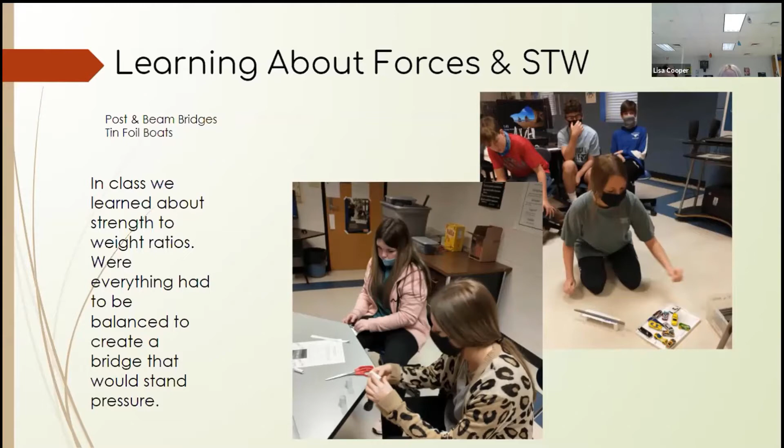The Warren Truss bridge uses equilateral triangles to spread out all the weight, and it minimizes all compression and tension forces. Deciding the type of bridge that we were going to make, breaking down and understanding the whole process of what we needed to complete was an immense challenge.

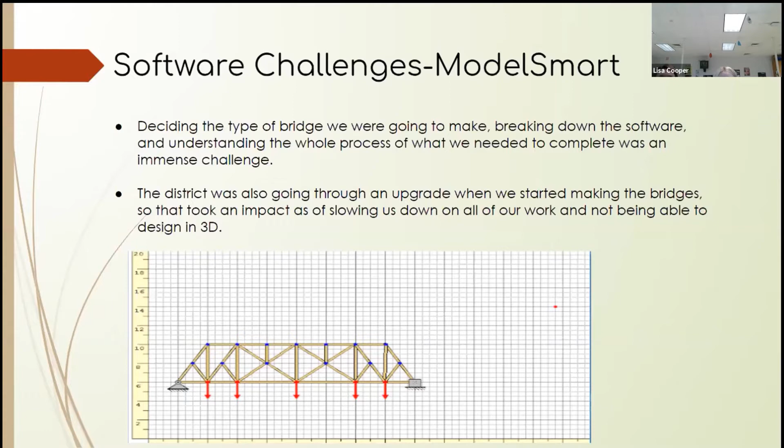Bentley was a challenge because there was a lot of options that you could choose from. It was really fun after you figured out how to use the options and how to dimension the elements.

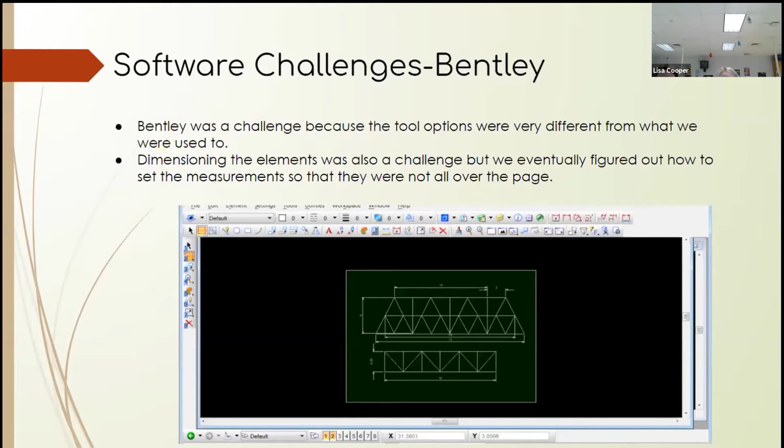Whenever we were testing our bridges, first we massed our bridges using a triple beam balance scale, and then we placed our bridges on a Pitsco structure tester and applied force to see how much the bridge would hold before it broke. This is on our last attempt, attempt number 4.

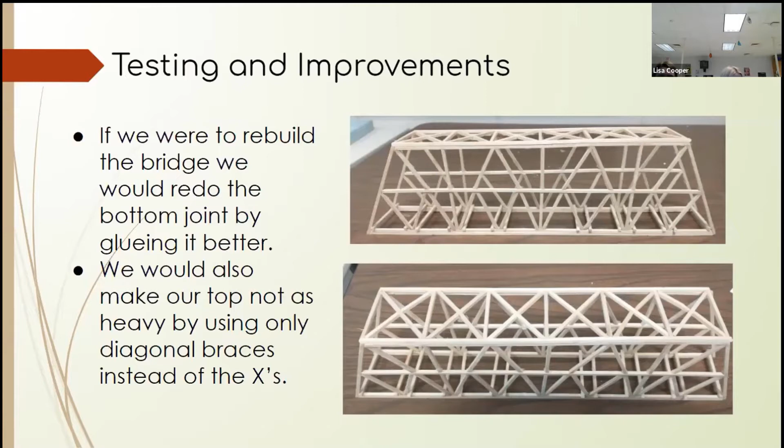If we were to rebuild the bridge, we would redo the bottom joint by gluing it better. Some of the joints broke off too. We would also make our top not as heavy by using only diagonal braces instead of X's. We actually went back in and removed the X's, just using diagonal.

We learned that we needed to make sure that everything was right and it was all symmetrical so that the bridge would be balanced enough to hold. We also learned that our cuts had to be exact or the bridge wouldn't have strength because the joints would not connect. And we learned bigger is not always stronger, and taller is not always better, when building our bridges.

We are the Cyberdean Builders. The reasons behind our design: we used a modified Pratt and Howe bridge because it consists of many triangles. The design was also 2 of the most common designs we've seen so far.

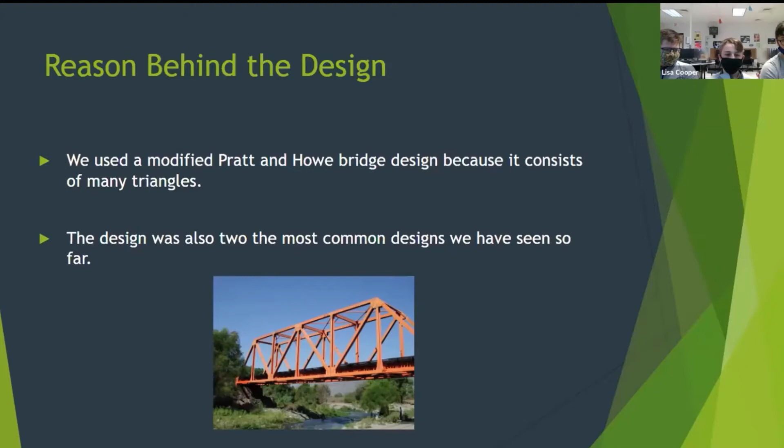One of the construction challenges that we faced was making sure that the measurements of the bridge lined up and that one side was not longer than the other. We also had to make sure that the cuts were exact so we would not waste too much wood.

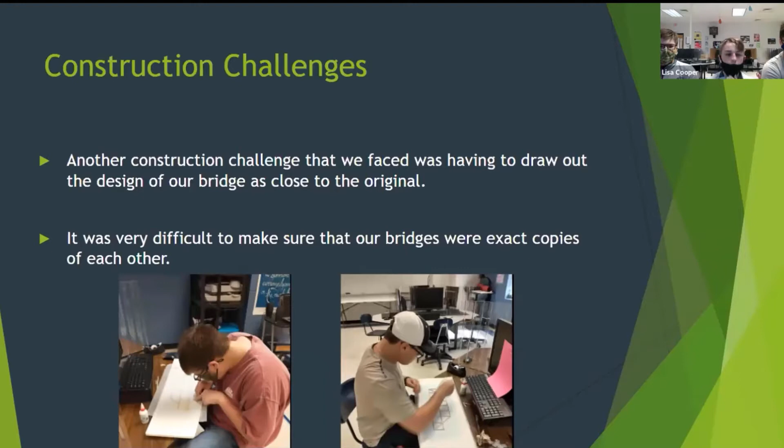Another construction challenge that we faced was having to draw out the design of our bridge as close to the original as possible. It was very difficult to make sure that our bridges were exact copies of each other. We also decided to use a design on top of our bridge, unlike before when we had a set of single pieces of wood going across the top. We also noticed that our bridge has two points where the forces meet.

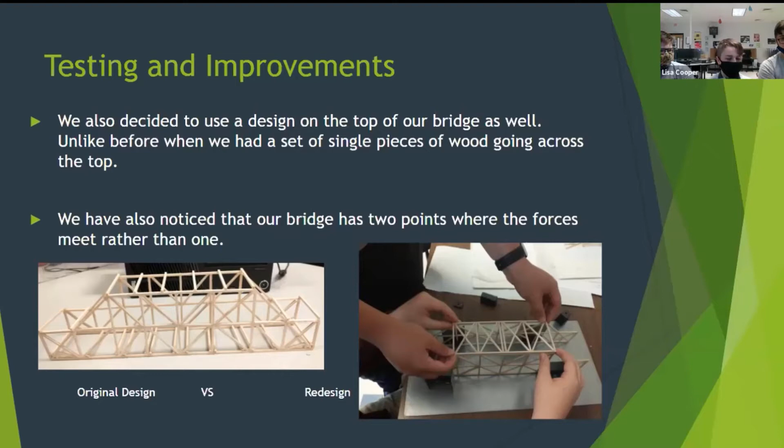We learned that it means to be responsible and work together as a team. We also learned to give our opinions on any problem and use each other's ideas to solve the problem.

We're the TBD. Starting off with the design, all three of us compared builds and later agreed to use the altered Baltimore truss style bridge.

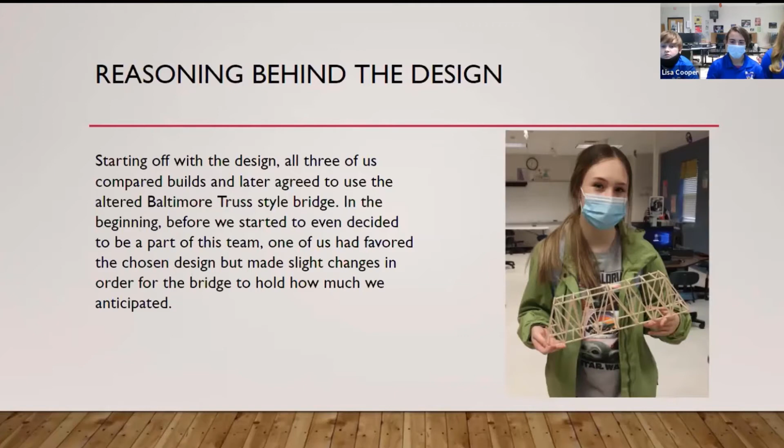Bridges made of triangles are stronger than those built with straight principles set at 90-degree angles. A bridge has to be symmetrical in order to be strong. In our Baltimore truss, the design includes diagonal members in a symmetrical pattern that take in both tension and compression forces as the live load crosses it.

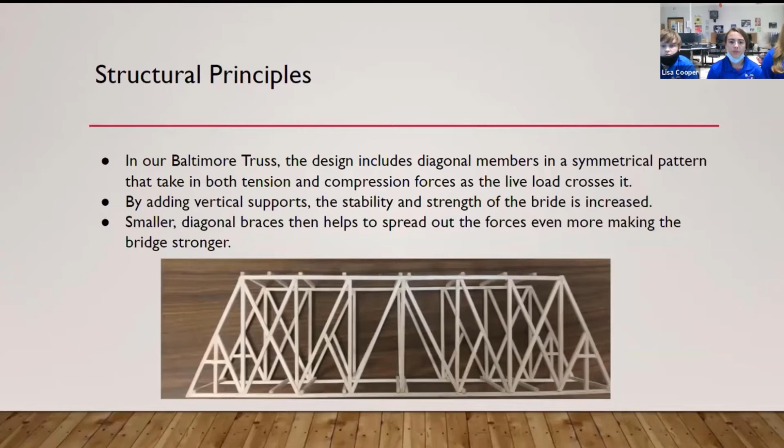By adding vertical supports, the stability and strength of the bridge is increased. Smaller diagonal braces then help to spread out the forces, making it even stronger.

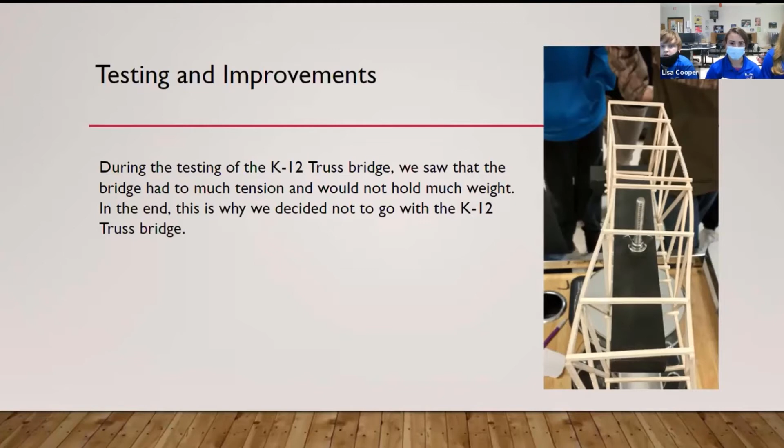During the testing of the K-truss bridge, we saw that the bridge had too much tension. It would not hold much weight. In the end, this is why we decided not to go with the K-truss bridge.

As we look at the Baltimore truss bridge design that we chose, we noticed that they all held very well, and the main fault was a construction failure. We mainly favored the structure and design of the bridge along the way it was modified. We then pursued the design.

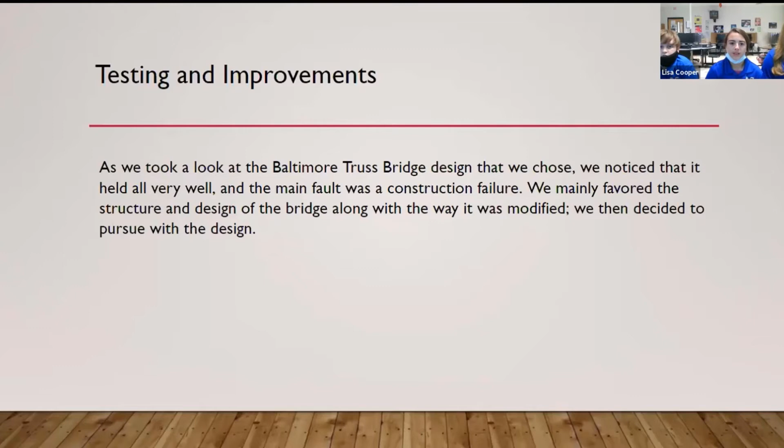We learned that one of the most challenging parts of building was attempting to fit the pieces perfectly, as well as being able to have everything symmetrical. Along with this, we learned how to safely use the materials we needed and to be extra delicate with every piece. Also, learning what held better was a big necessity.

Many triangular pieces were our biggest advantage, especially with the Baltimore truss bridge. We learned that we needed to pay big attention to all the details.

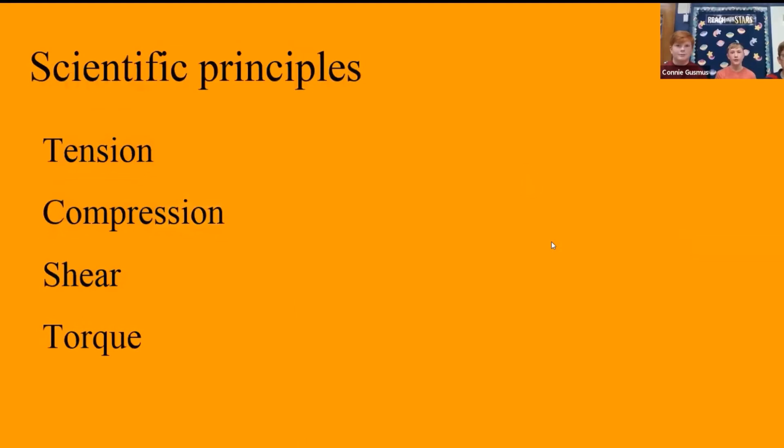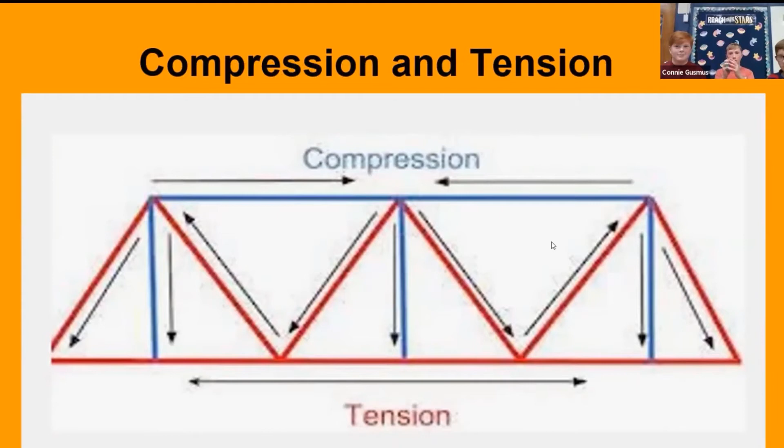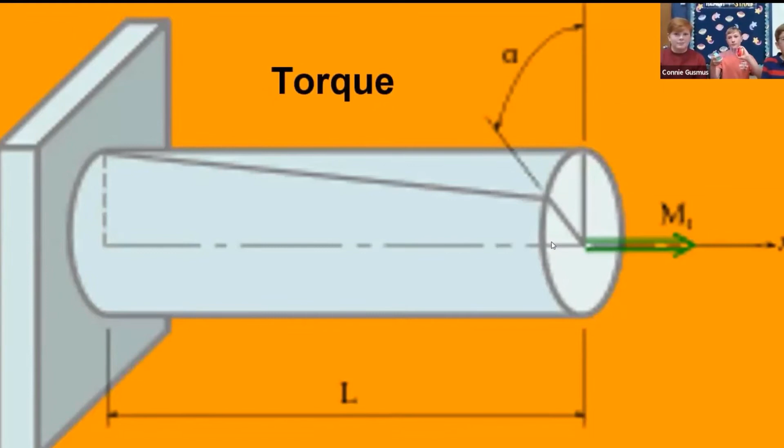These are our scientific principles: tension, compression, shear, and torque. This is an example of tension and compression: tension is pulling the wood tight, compression is applying force on the wood, shear is sliding the wood which might cause structural strain, and torque is twisting the wood which might cause rotation. This is an example of a bridge with torque, which we do not want our bridge to do.

We know that in construction, triangles are the strongest shape because they can hold the most weight. We wanted to stick toward designs like the Pratt, the Howe, the Camelback, and the Warren. After researching, we tried to decide our design using ModelSmart 3D.

We took our structure weight and our breaking load and averaged them out, and these are our top three bridges. John David's best bridge was 1,204. Colin's best bridge was 1,143. And Trey and my best bridge was 896.

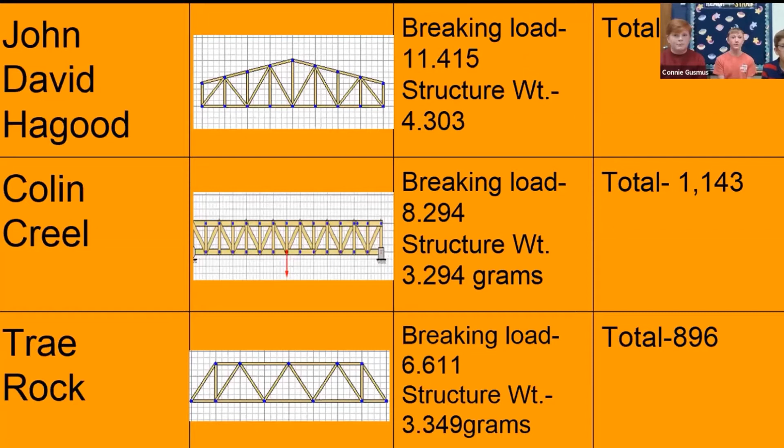This red arrow shows where we put the load on it so we can test it, and it will pour down on the bridge. Over here is a fixed support and a horizontal roller. The darker shades of the colors mean that it had more strain on the wood.

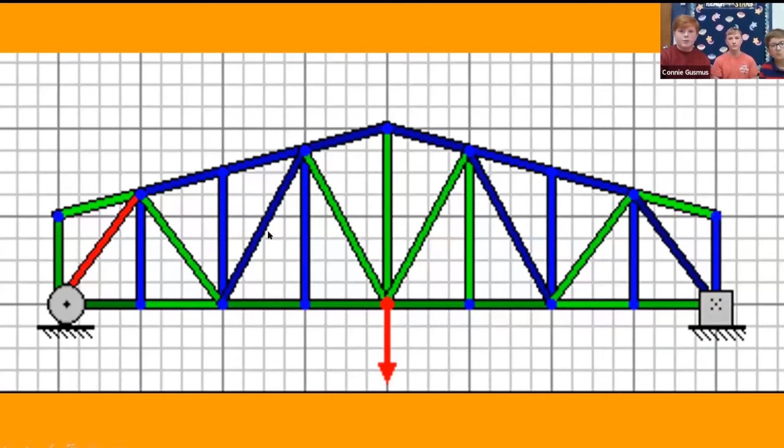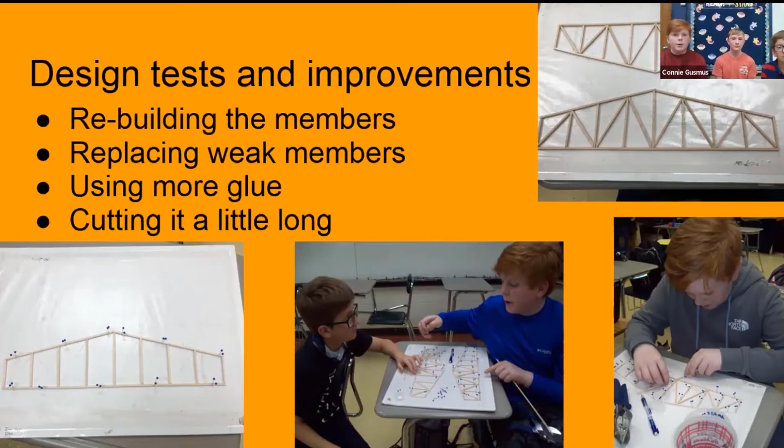After we finished gluing both sides and doing small tests, we figured out we needed to rebuild some members that were either cracked or broken, replace weak members because the wood was too spongy, use more glue for a stronger fit, and cut the wood just a hair long so it would have a tight fit.

This is us after we finished both sides of the bridge in 2D, and as you can see, we finally fixed the 3 pieces of balsa wood that were going the same side.

We measured the mass of our balsa wood because we wanted to see how much our bridge would weigh and how much we wasted versus used. The mass of our bridge was 10.3 grams, the mass of our scrap wood was 3.7 grams. Our scrap wood is the wood we put to waste and didn't use when cutting excess wood off, and the mass of one stick is 1.8 grams.

We wanted to see how much wood we used, so we added the mass of the bridge and the scrap wood together and divided it by the mass of one stick, getting 7.8 — so we used about 7.8 sticks of wood in all. We did this because in the real world, when doing a real project, you want to be as inexpensive as possible and waste no material.

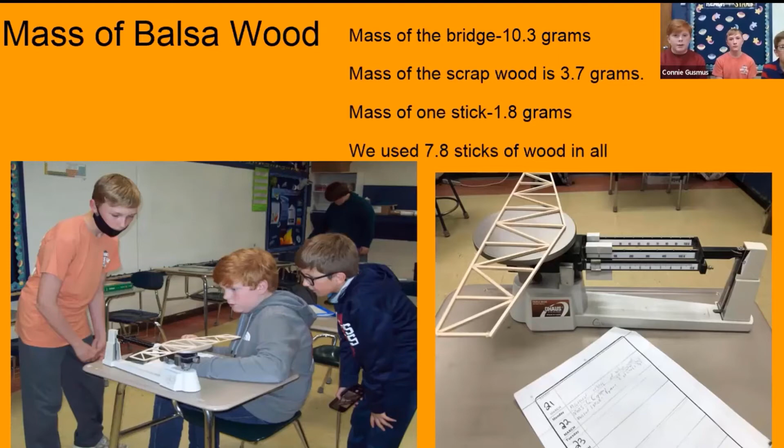This is our final bridge design after we 3D'd it, and as you can see where the broken member is in the big red circle, that is where it broke during the process of 3D'ing our bridge.

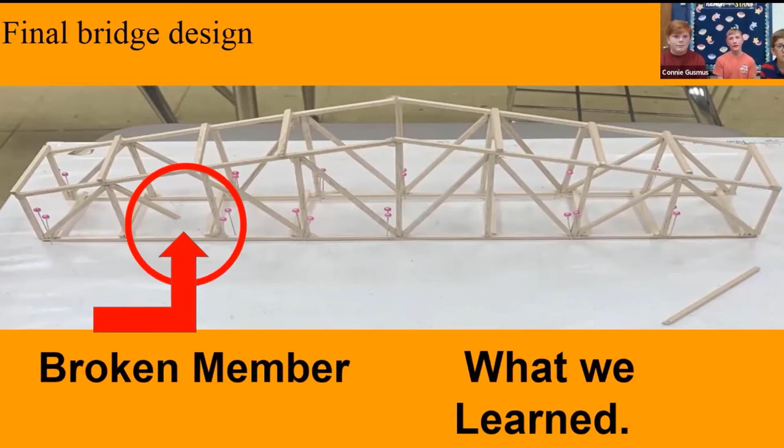What we learned from this was teamwork, work ethic, and that when you're engineering, you're going to face challenges and you have to overcome them.

This is our bridge after we fixed all of the broken members and all of the other cracked members. This is our bridge now, fully built.

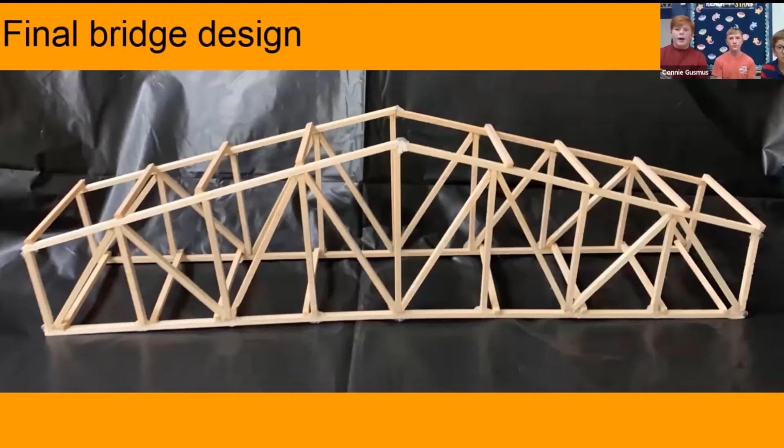Our teams this year are Big Brains and Team Volume. Our team was called the Big Brains. The goal of this project was to design a lightweight bridge that would hold a lot.

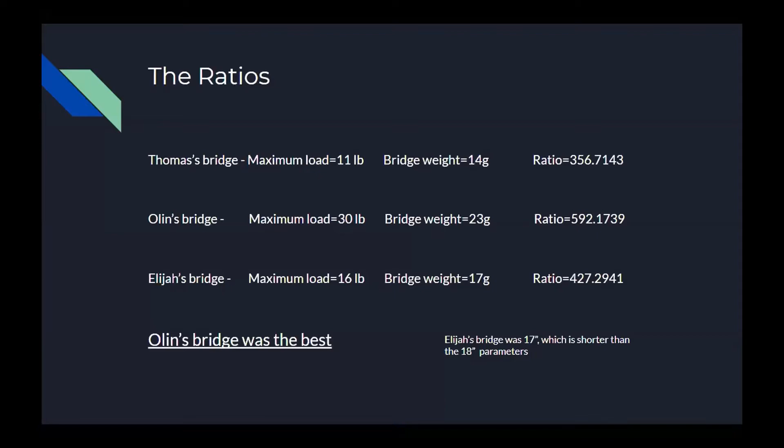We decided to build 3 separate bridge designs and see which had the best strength-weight ratio. We ended up all building different variations of the Pratt bridge. The Pratt bridge originated in 1844, originally designed by Thomas and Caleb Pratt to go over a 250-foot gap, and it was most commonly used for railroads.

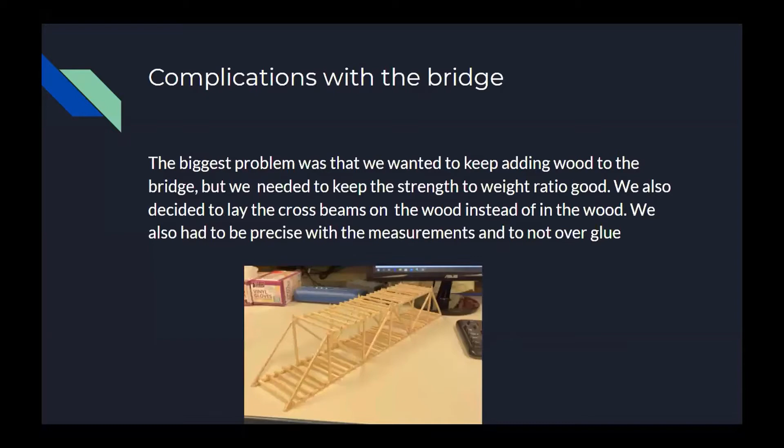Some complications with the bridge were that we wanted to keep adding wood to make it stronger, but we needed to keep our strength-weight ratio good, and we needed to be patient and precise with our measurements. The way we design our bridges is with ModelSmart software.

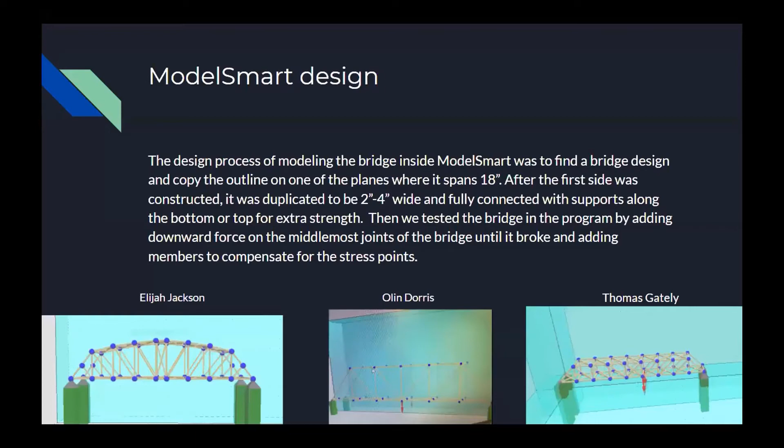The way you make your bridges is you put the joints on the plane and connect them with members, spacing them about 2 inches apart and connecting them across with members. After we used ModelSmart to make our bridges, we made a 2D render in Bentley.

Something I learned from doing the bridge is that when you're cutting angles, it's important to get your angles right so there aren't gaps in your bridge, called weak points, and to not force members in that are too long to support.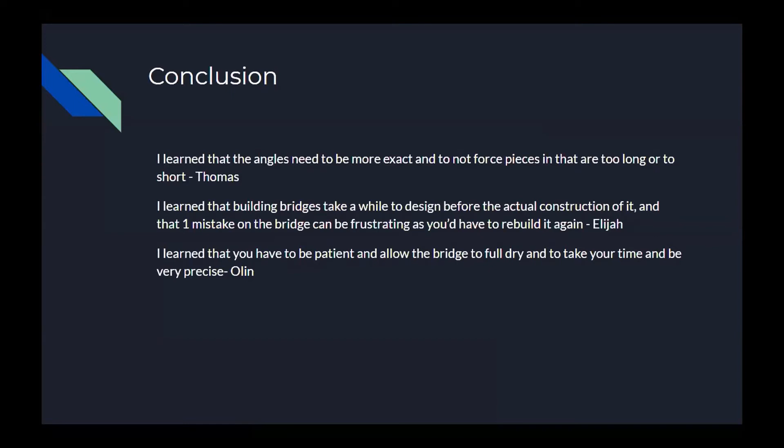What I learned was that it takes time, and if there's one mistake, you'll have to rebuild it. I also learned to be patient with my bridge and allow it to fully dry, and again to be very precise with the measurements and angles.

This is Team Volume's 2021 AASHTO Bridge Competition presentation.

I'm Sawyer Levinson. I did a modified Baltimore truss bridge. I then did the modified Pennsylvania truss bridge. I did a modified Howe bridge.

This is my bridge. As you can see, I added and subtracted a couple members from the sides to make it a little bit stronger and weigh a little bit less. My strength to weight ratio was 475.6.

And this is my bridge. It weighed 24 grams and it held 35 pounds.

Its length was 18 inches and its height was 4 inches. The strength to weight ratio is 662.1.

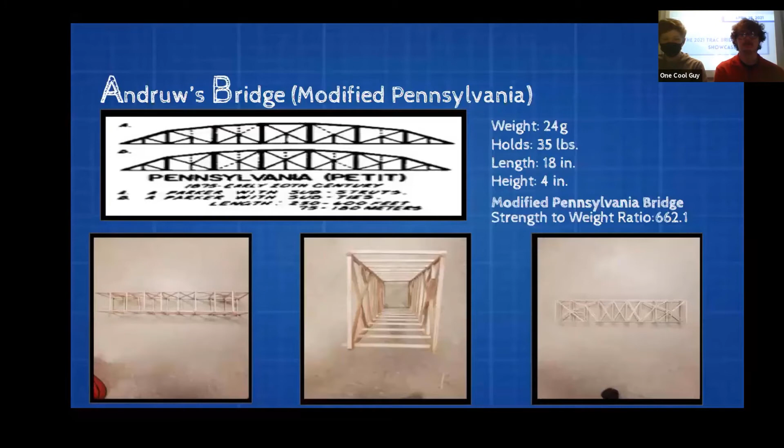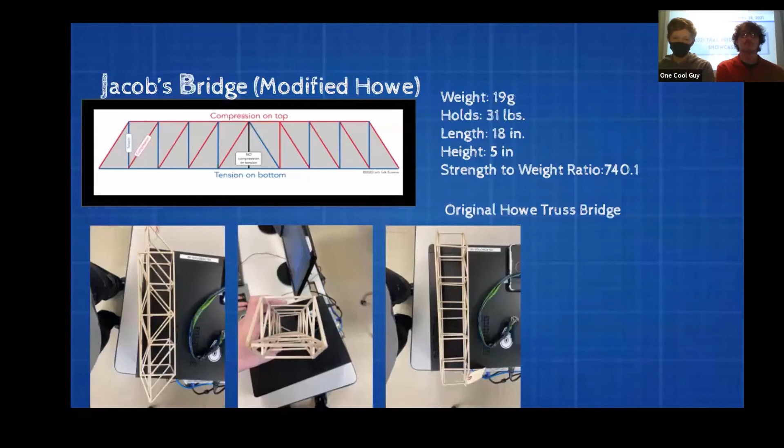My bridge was a modified Howe. It weighed 19 grams, it held 31 pounds, had a length of 18 inches, a height of 5 inches, and a strength to weight ratio of 740.1.

This is the Bentley sketch that we used the Michigan tutorial for to do, and it shows all the different views of the bridge that we chose and all the lengths.

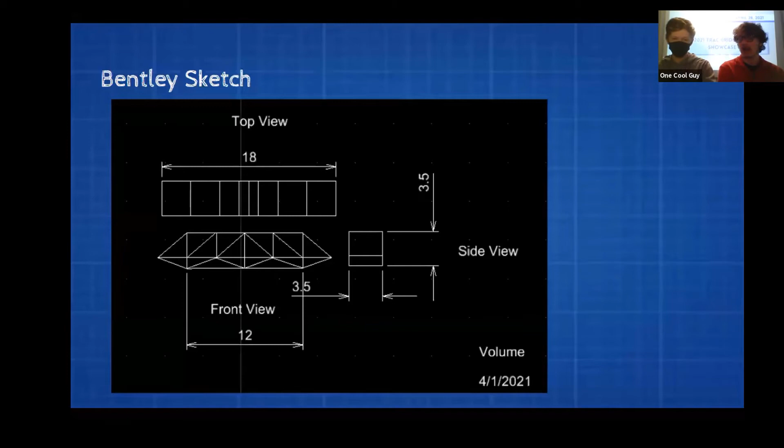Possible improvements we could have made were, after making and testing all of the bridges, we could support the ends of the bridges more and put triangles as supports, because we learned from Jacob's bridge that the more stuff you have supporting it underneath, you could still make it light, but also make it strong.

And what we learned was patience, and we learned timing, and then we learned craftsmanship, and we also learned teamwork.

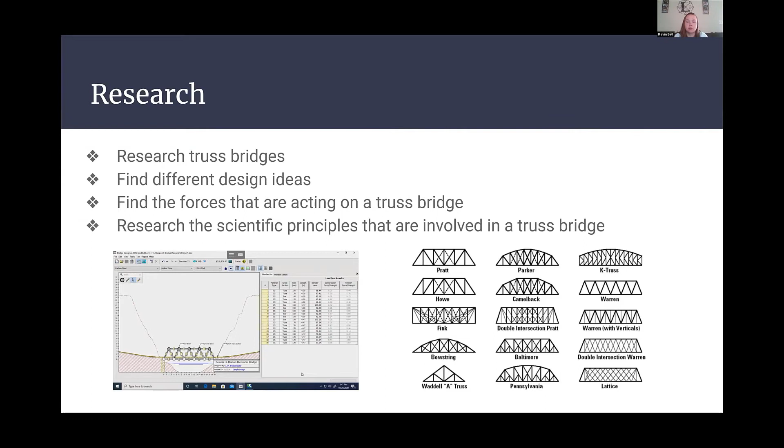When we first started this project, we researched different types of truss bridges and used those to come up with our own design. After we did that, we researched the scientific principles involved in truss bridges, and we found the forces that act on a truss bridge and combated them.

At the beginning of our school year, we did tech talks in class. This helped us practice public speaking, scientific principle research, proposal principles research, and presenting research in class.

There are many forces that acted on our bridge during this competition, and we tried our best to design a bridge that can combat these forces.

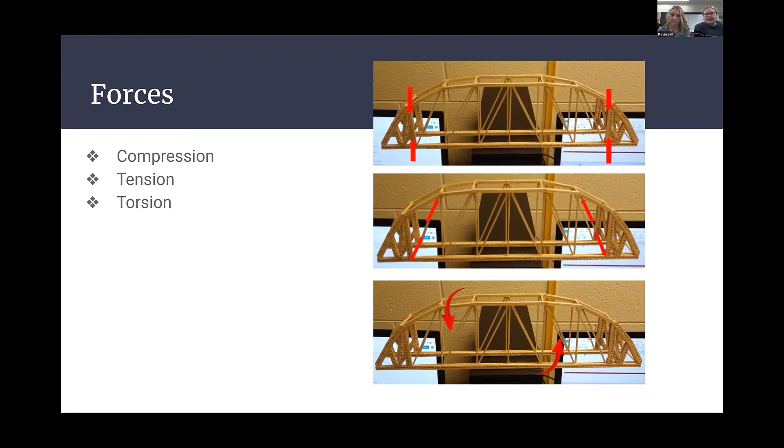Another force we had to combat was deflection. As you can see, the testing block pushes down onto our bridge, and we had to make sure that our bridge could hold that. In the bottom left-hand corner, we have modulus of elasticity, which is the pushing and pulling of an object.

We have friction, and you can see where our bridge rubbed on the Pitsco tester. And in the bottom middle, we have shear force. You can see where the testing block pushes down on our bridge and where it would lift up in the back on the other side of the tester.

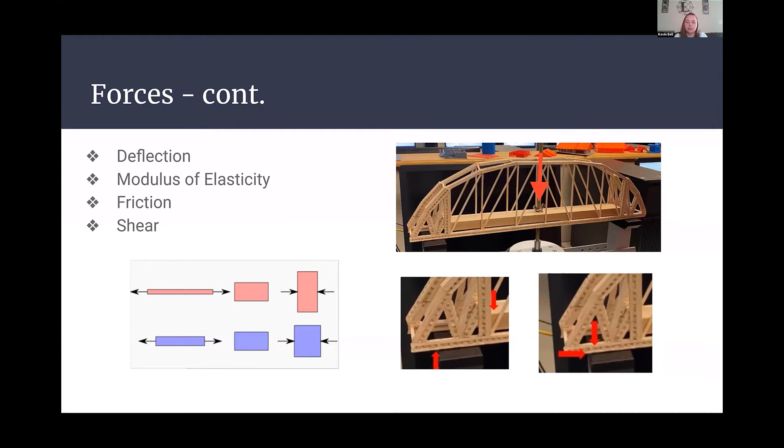We had different construction tools that we used throughout this process. Another construction tool that we used was a 3D printer. We used the MakerBot Replicator Plus to make jigs to hold our balsa wood in place while we glued it, so it would all be even and wouldn't move.

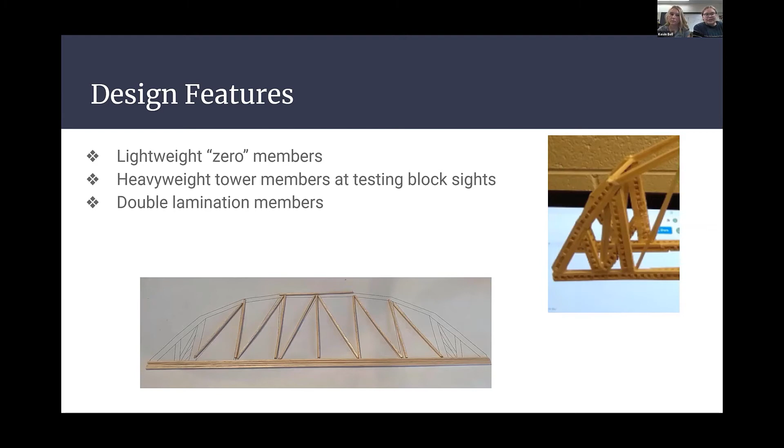We had many design features that we put into our bridge so it would be the most efficient. We had lightweight zero members, which were single pieces of balsa wood that hold little to no weight. We had heavyweight tower members at our testing block sites, specifically shown in the picture to the right. These were our biggest members because they held the most force. Our double lamination members were two pieces of balsa wood laminated together for slightly more strength.

We used different types of software throughout this process. In the top left, we have Model Smart 3D, which we used to create our final design for our bridge. In the top right-hand corner, we have West Point Bridge Designer, which we used when we started learning about bridges, to see what we could make.

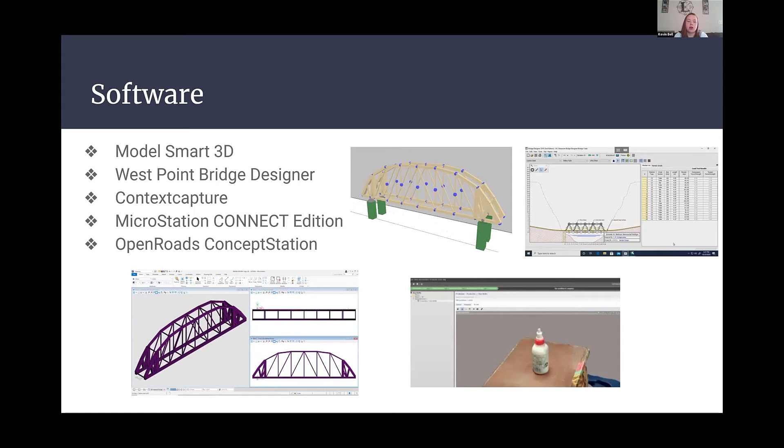In the bottom right, we have Context Capture, which we used to see how 3D imaging would work. In the bottom left, we have MicroStation Connect Edition, which we used to make our final bridge design. We used OpenRoads ConceptStation to see how bridges, roundabouts, and intersections work into roadways, and we were able to design some ourselves, which was really nice.

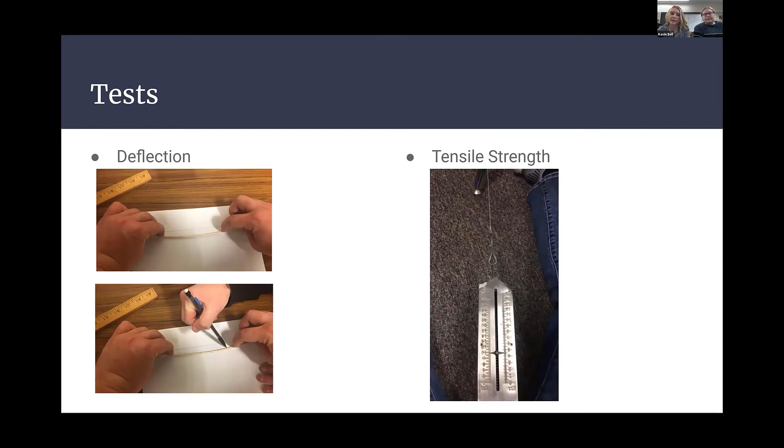Here are some pictures of our bridge testing. In the top left corner, you can see what it looked like before there was any weight on it. In the bottom, you can see a picture of what our bridge looked like while there was weight bearing down on it. And in the top right corner, you can see what our bridge looked like after it broke.

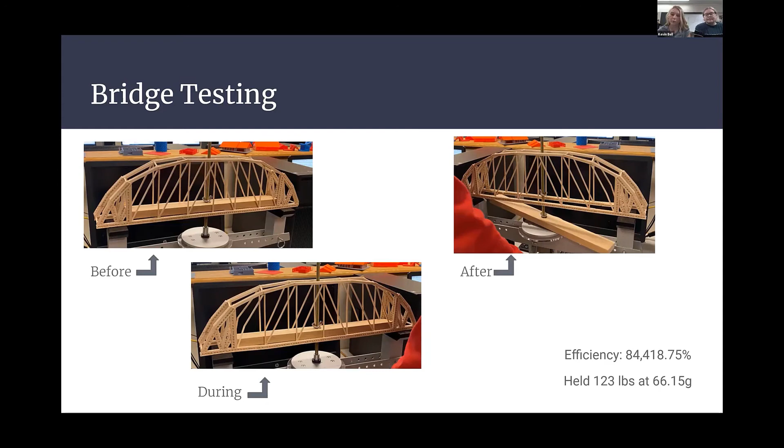The efficiency of our bridge was 84,418.75%, and it held 123 pounds at 66.15 grams.

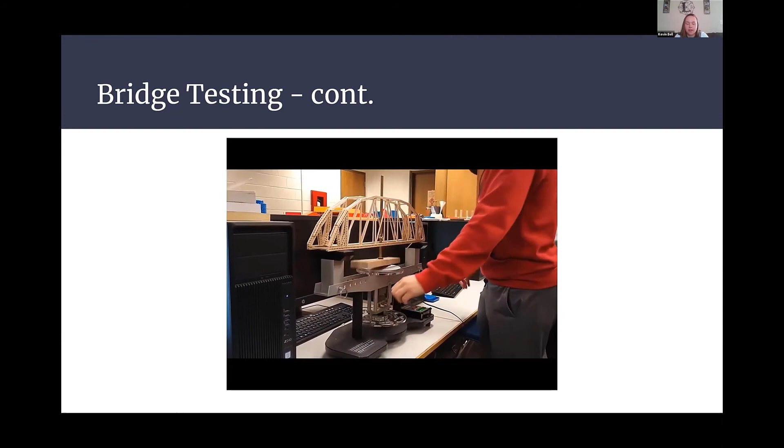As you can see, the bottom of our bridge is starting to go down a little bit towards the end, and it ends up causing our bridge to break like that because we didn't have enough support in the bottom.

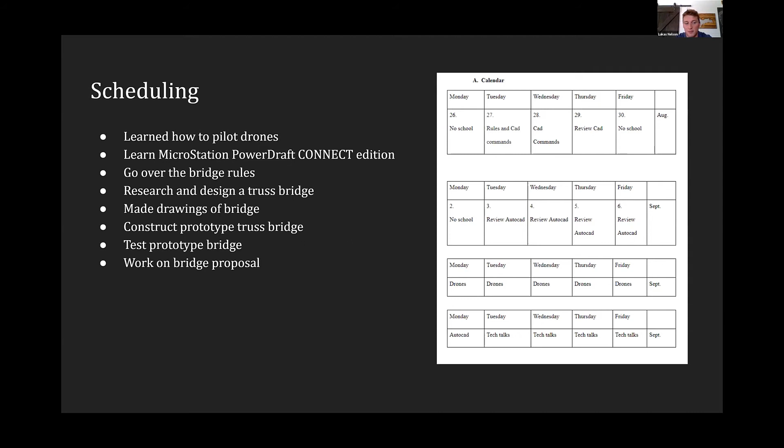Next, we made drawings of our bridge. We constructed a prototype, and we tested the prototype. Next, we worked on our bridge proposal.

We researched the truss bridge and the different designs right away. Then we furthered our search into where the forces get directed, so we could pick out the best one to use for the competition. Depending on where the forces got directed, we then searched for the scientific principles and how they relate to the bridge. Getting to know the scientific principles helped us a lot with putting different materials where they needed to go.

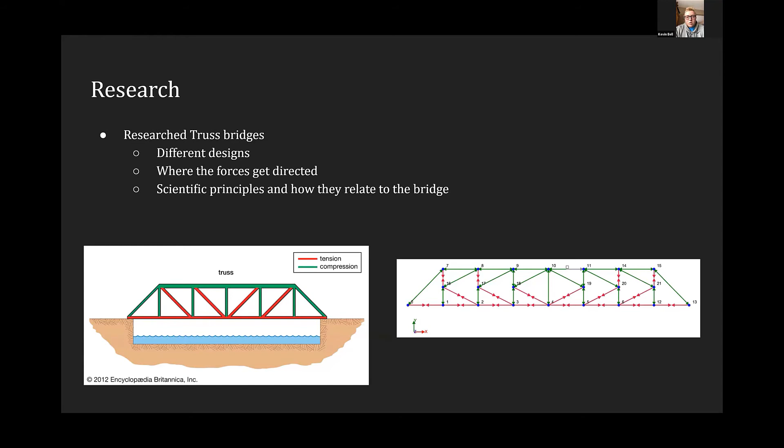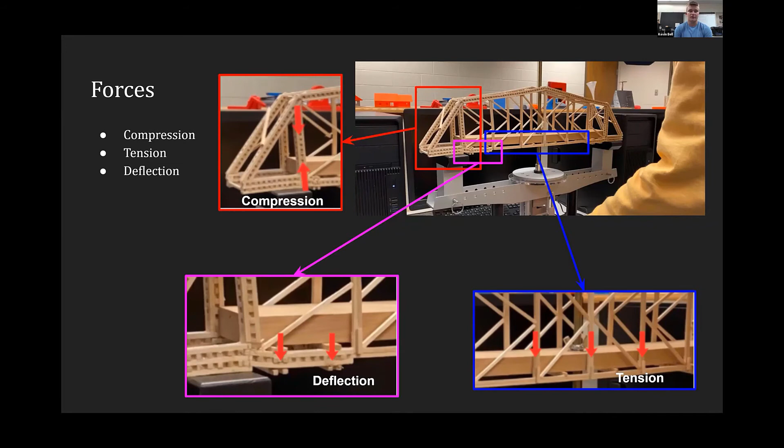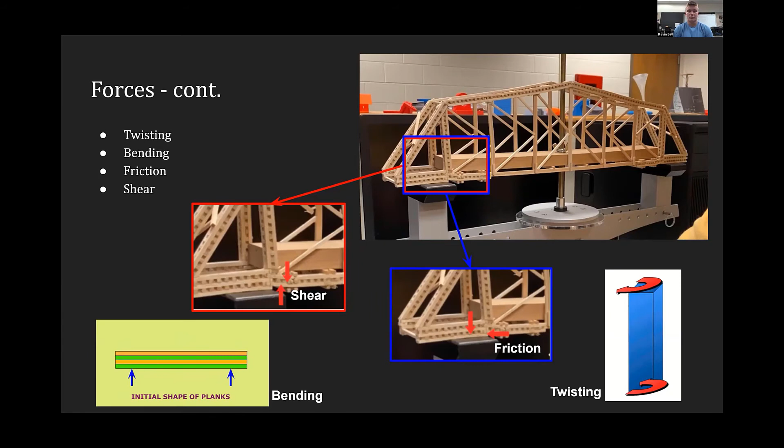We had a couple of different design features in our truss bridge. We intersected the pieces to make stronger beams. Having the stronger beams puts the force out more onto the tester, and it caused our bridge to hold a lot more weight.

We also intersected the beams to make stronger joints. The joint is where the bridge normally breaks most often, so if we beefed up the joints, that caused our bridge to hold a lot more weight and caused our percent efficiency to go up.

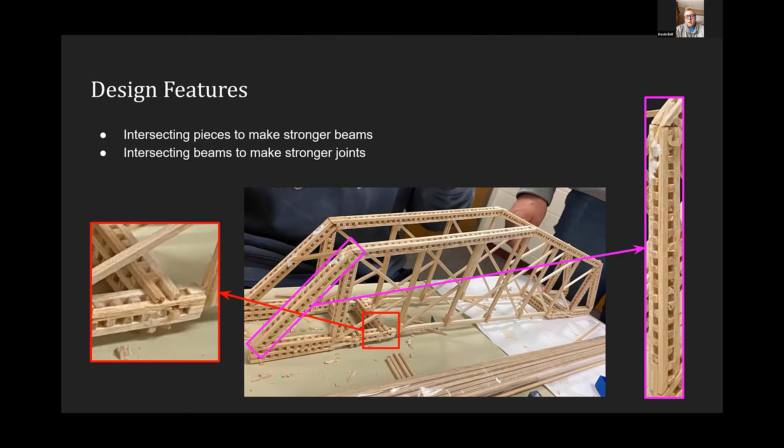We started out with Model Smart 3D and West Point Bridge Designer and tried to create the strongest bridge. And then we went from there building it.

We did multiple tests on our balsa wood. These included the torque test, the density test, and the shear test. We also did a spring force test and a deflection test.

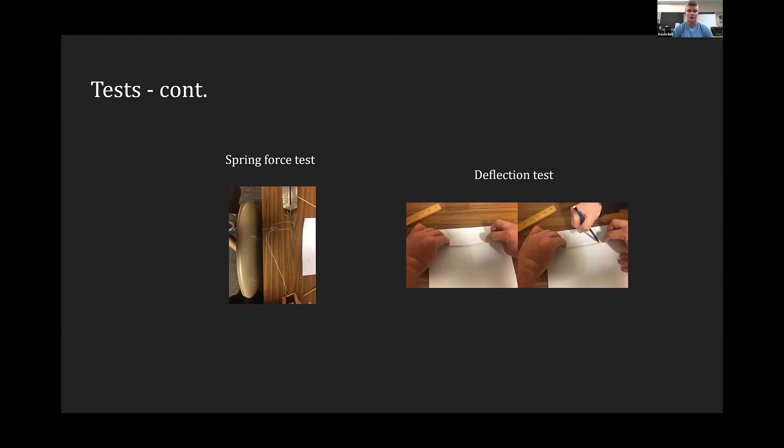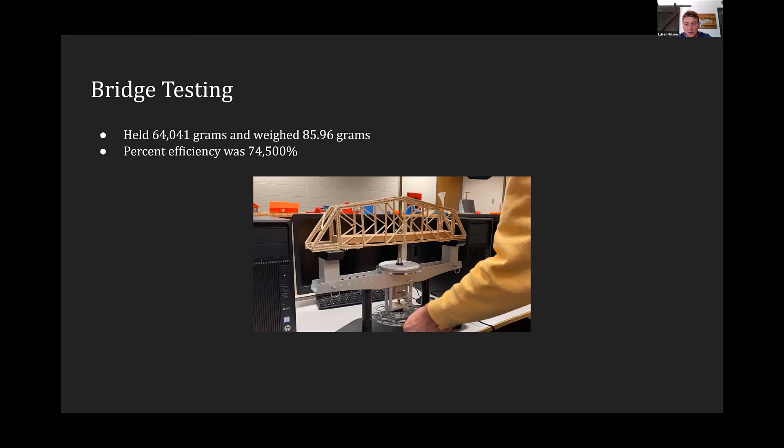After we built our prototype, we tested it on the Pitsco tester, and it held 64,041 grams and weighed 85.96 grams. Its percent efficiency was 74,500%. As you can see, it breaks on that left-hand corner along the edge.

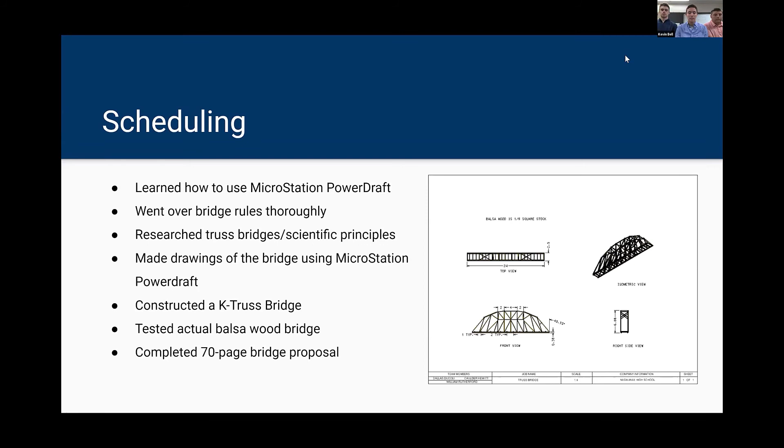We decided that we wanted to learn how to use MicroStation PowerDraft. We went over the bridge rules thoroughly. We researched truss bridges and scientific principles. We made drawings of the bridge using MicroStation PowerDraft. We constructed a K-truss bridge. We tested the actual balsa wood bridge, and then we completed the 70-page bridge proposal.

Another thing that we did was something called Tech Talks, where we would inform the class about advancements in bridge technology and engineering in general. We learned about current and upcoming bridge designs and concepts, but ultimately we practiced public speaking.

Some of the research that we did through this project was searching for designs that'd be realistic to make with balsa wood, and we looked into multiple different concepts and designs. We had to find where force would be most effective on our bridge, and we had to look into how all scientific principles would be present in force on our bridge.

We were able to mitigate the torsion forces by putting crossing members between our two trusses.

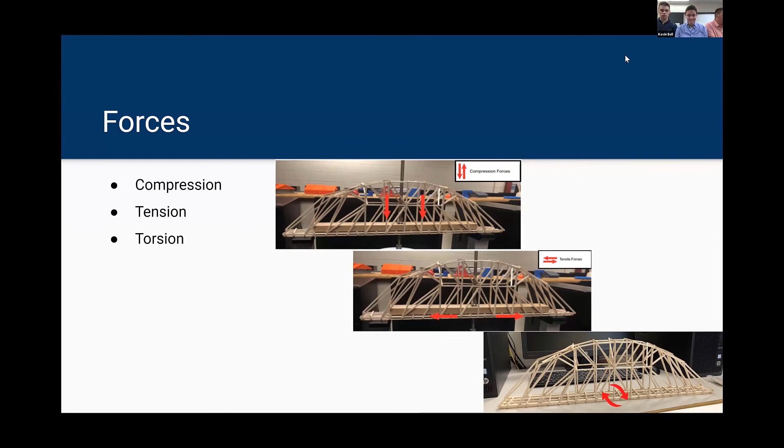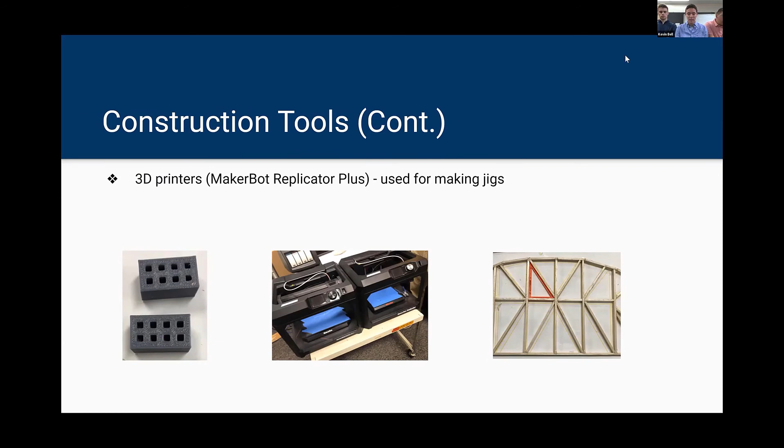Some construction tools that we utilized during our project: another tool we used was MakerBot Replicator Plus 3D printers, which we used for making jigs. In the image to the lower left is what we would call a spacer jig to make interlocking members in our bridge design. To the right is a triangular jig, which we use to make the Ks in our K-truss.

Some of the design features which we had were a lightweight bridge deck, which would distribute force from the testing block, laminated members used in trusses, and truss design, which would divert force away from the deck of our bridge.

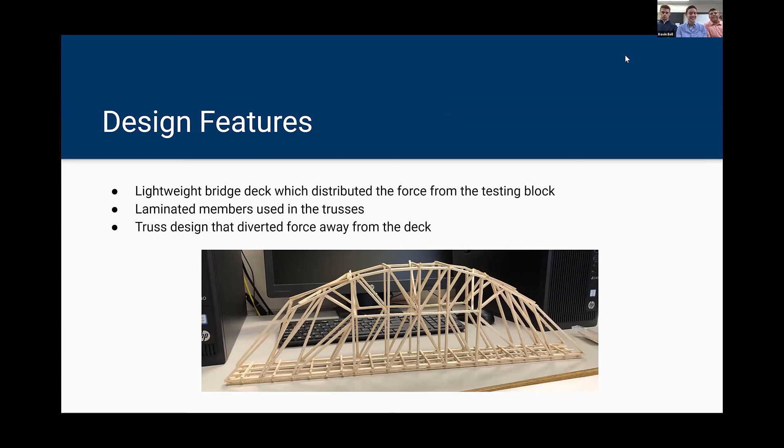We use software including Model Smart 3D, West Point Bridge Designer, MicroStation PowerDraft, and Context Capture. We also use Open Roads to put interstates, roundabouts, and bridges around streets in Negaunee, and street lights, traffic lights, and simulated traffic as well.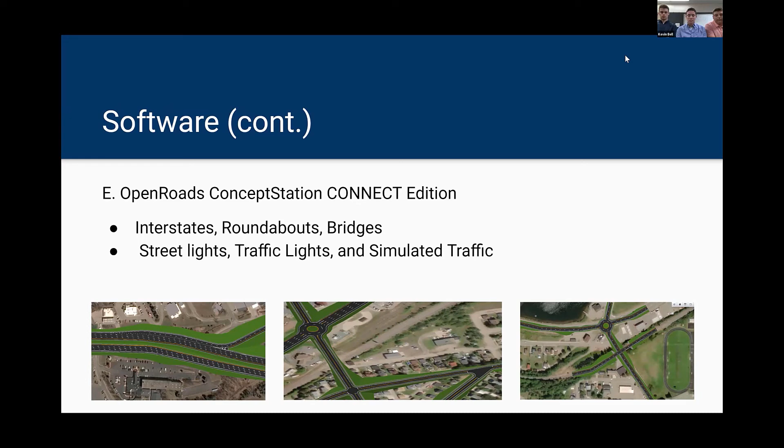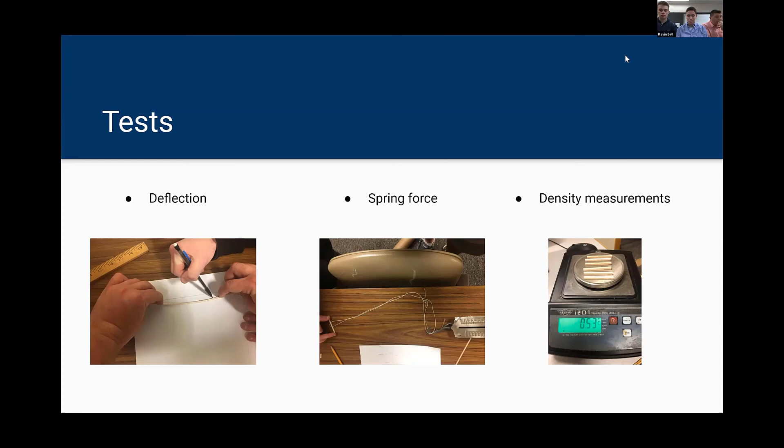During the construction of our bridge, we performed multiple tests to determine the properties of balsa wood. The first image illustrates us testing how much deflection a single piece of balsa wood can handle. The second image showcases us doing a spring force test. And the third image shows us measuring the differing densities of balsa wood.

During the bridge testing phase of our project, our bridge held a total of 113 pounds while weighing in at 60.93 grams. After using the strength to weight ratio, we found out that our bridge had an efficiency of 84,198%.

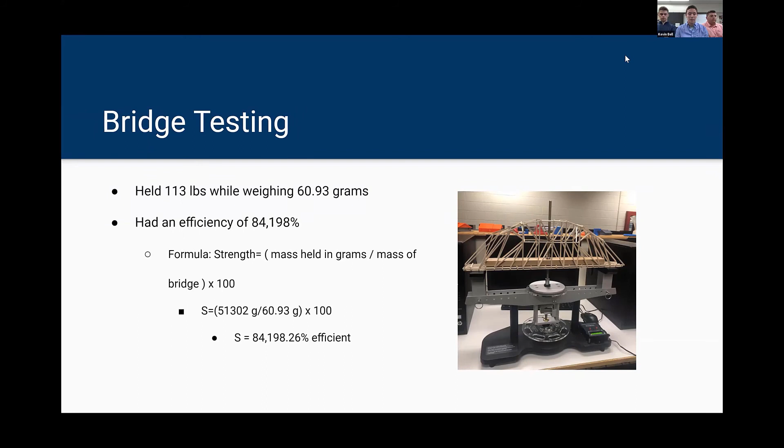In this video, our K-truss bridge is shown on the Pitsco tester with the testing block on the roadway. And as you can see, it broke on the edge of the testing block.

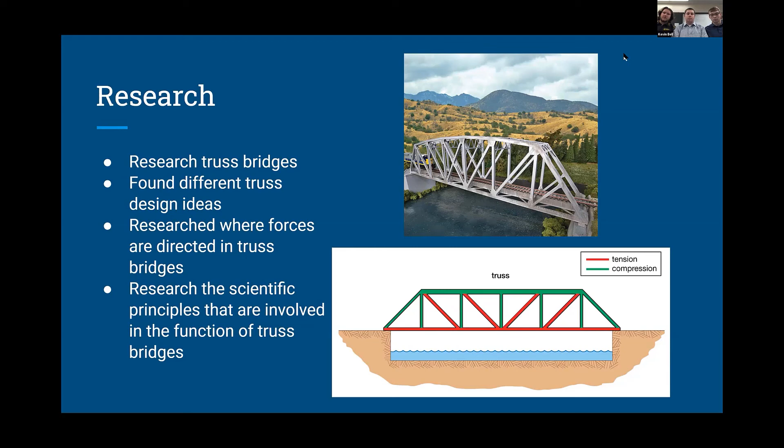At the beginning of the year, we did research on truss bridges so we could find the different design ideas. We also researched where the forces are directed in those truss bridges, and in doing that, we found the scientific principles that are involved in the function of a truss bridge.

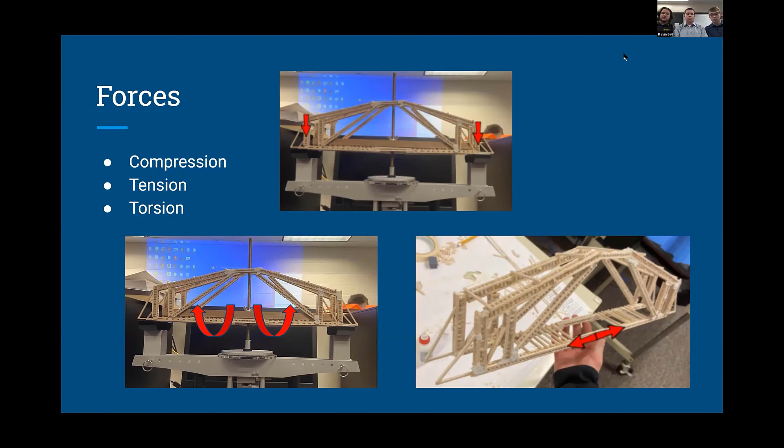So on our bridge, there were some forces. In the top picture, you'll see the compression force on our bridge while it's on the Pitsco tester. In the lower right picture, you'll see where the tension force is. And in the lower left picture, you'll see where the torsion forces are on our bridge while it's on the Pitsco tester.

Other forces acting on our bridge include a deflection force between the bottom chord and the load. It would move down when a load was placed on it. The bottom right picture shows a friction force between the tester and the bottom chord of the bridge.

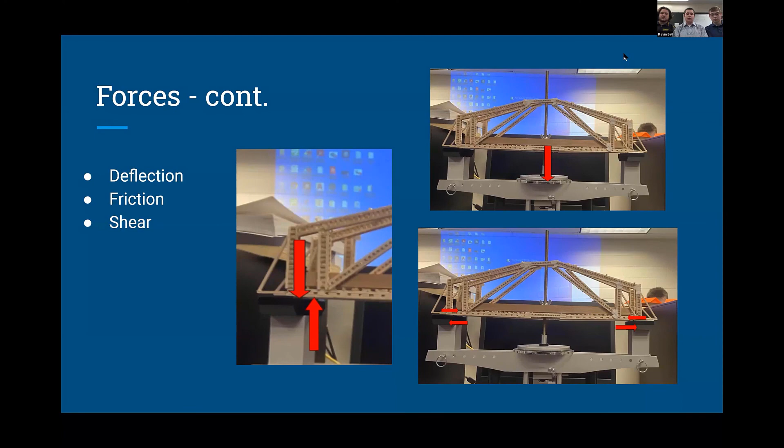And on the left picture, it shows a shear force between the chord and the load on the bridge. A few different tools were used throughout the construction of our bridge. We also used 3D printers.

Our 3D printers were the MakerBot Replicator Plus models, and they were used to 3D print our jigs. The jigs were used to make our thicker members of our bridge. While making our trusses, we used a few different designs for our members. We had our thick compression members, as you see in the bottom picture there.

Those members were made thick to hold more force. We had our thin connecting members in the top right photo. Those were just our zero members that held our two trusses together. And we also had our crossing inside piece members, which were the tiny pieces of balsa wood put inside of our half-inch jig there in the top left picture.

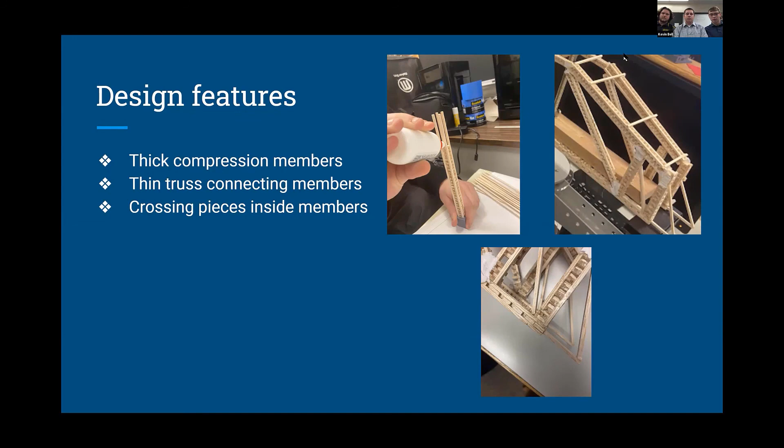We also used a bunch of software throughout the unit. The main one was Microstation Connect Edition. This software helped us build our bridge to the best we could. It was very handy. We could see all 4 views of our bridge.

And we also used Open Roads. This was a very fun program. We improved roundabouts and intersections throughout our town. We also used Context Capture. We used this to the best of our ability.

West Point Bridge Designer helped us see where forces acted on our bridge and made the most cost-efficient bridge. We used Model Smart to see where the forces were on our bridge and which bridge design held the most force.

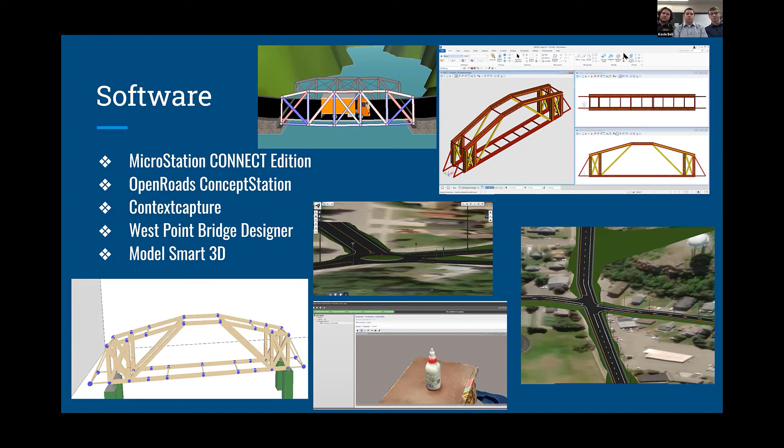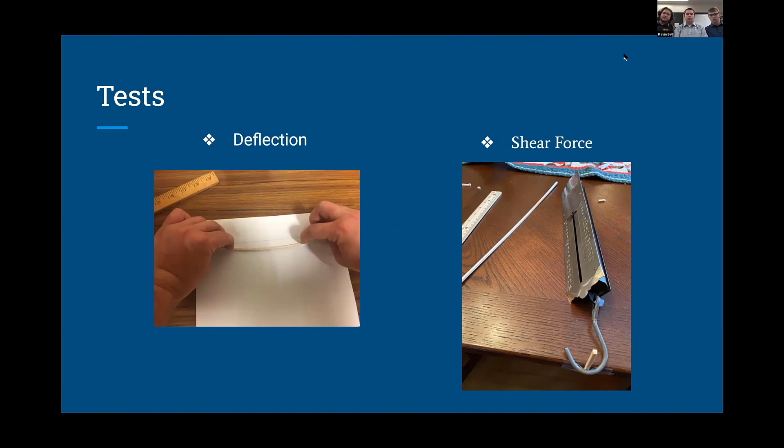In the left picture, you'll see us testing deflection by bending a piece of balsa wood to see how far it would deflect before finally breaking. And in the right picture, you'll see us testing shear force by pulling a piece of balsa wood that's taped to a table to see how much force it could take.

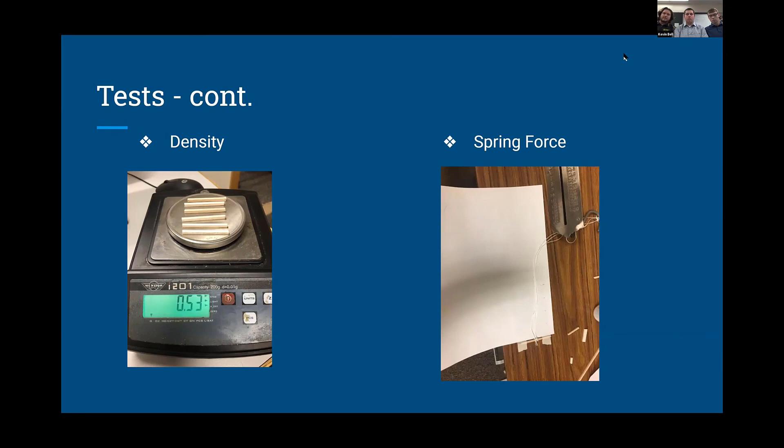After the construction of our bridge was finished, we tested it on our class Pitsco tester. In the left picture there, you can see our bridge on the Pitsco tester with the testing block slid through the middle of our bridge.

In the middle picture, you can see the load is being applied to our bridge and the bottom chord is being deflected. And finally, in the far right picture, you can see our bridge after it was tested. Our bridge held a total of 49 pounds, massing in at 112.36 grams.

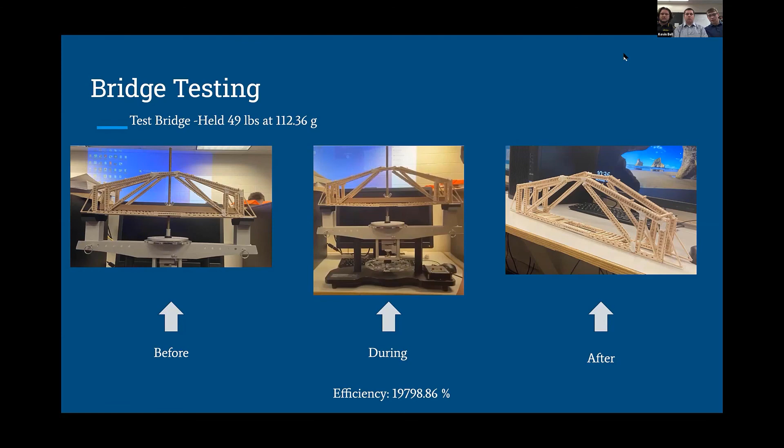Our efficiency was 19,798.86%. As you see, Braden is turning the knob, which is applying a force on our bridge. And in the right there, you see our bridge gives out at 49 pounds.

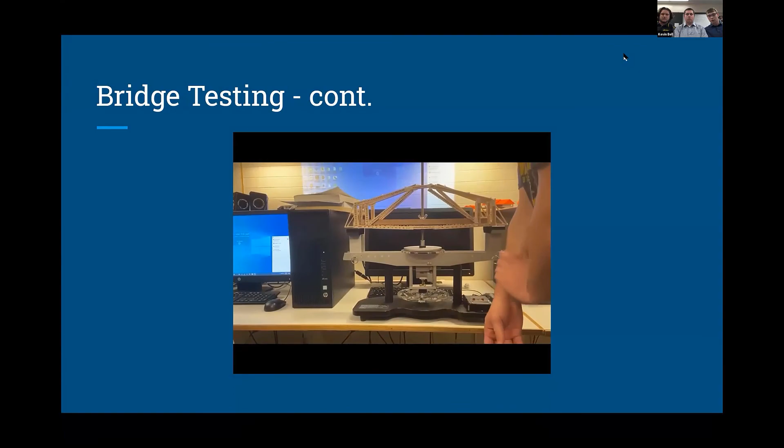So we have a 2-part question. The first part is, before you participated in this showcase, how many of you were interested in going into a career in civil engineering, working at a DOT? How many of you would have been interested before doing the showcase? And how many of you now after doing the showcase?

I think about 7 or 8 of them are continuing on their education in civil engineering. I can't even express how important this is for the kids and being able to have the opportunity to use Bentley software, and all the time that the sponsors put in - we really appreciate the opportunities.